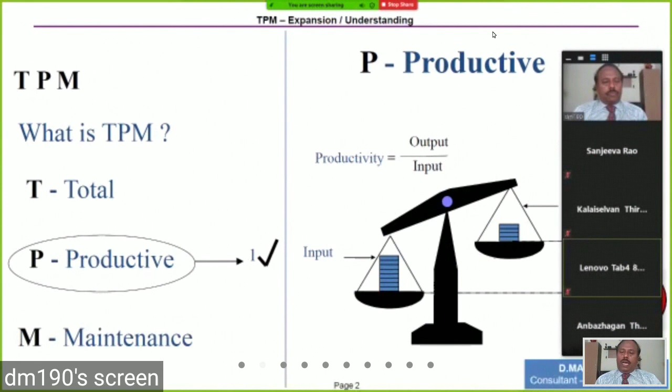So the P stands for productive, that is nothing but productivity, that is output by input. Then what does the total stand for? So what to do with the P? I want to increase the P. To increase the P, I want to know what are all the losses. So generally losses are categorized in two forms. One is time loss, another one is cost loss. Time loss is related to output. If the time loss is there, the output gets reduced.

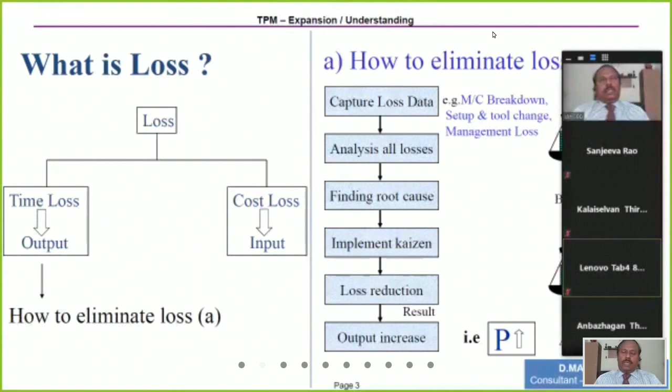What is the cost loss? So I have a lot of inputs, that is 4M, 5M: man, machine, material, method, money. If there is a loss, the input will get wasted, the money wasted. So loss is categorized as two losses, time loss and cost loss. Then what to do with the time loss? So you have to eliminate the time loss. So what you have to do?

So first you have to see what are all the time losses. How to eliminate the time loss? You have to see what are all the losses. Maybe machine breakdown stoppage is a loss. Then setup and tool change is a loss.

And one more big loss we saw in many companies, not only in engineering companies. Nowadays, I am not going to consultation only for engineering companies. I am going to pharma companies, textile companies, process companies, plastic companies, food and beverage companies. I am going to so many companies. In all of them, these losses are there.

And also a management loss. What is a management loss? Sir, I am waiting for some quality approval. I have given the samples, particularly in pharma companies. They will give the sample and it will go to the laboratory. The laboratory has to check and give the approval, then only he can start the next process. So you will be waiting hours together. And in assembly sections like BAPCO, they will all be waiting for washers. So these are all called management losses.

So you have to capture all these losses first, on a daily basis. Then you have to analyze the loss. Why this loss? It is waiting for QC, and it is taking more than the time. The standard time is only 5 minutes. Why is it taking 4 hours? So break down why it is taking so long. You have to take the phenomenon and analyze. That means first you have to identify the loss, then capture the loss, then analyze the loss.

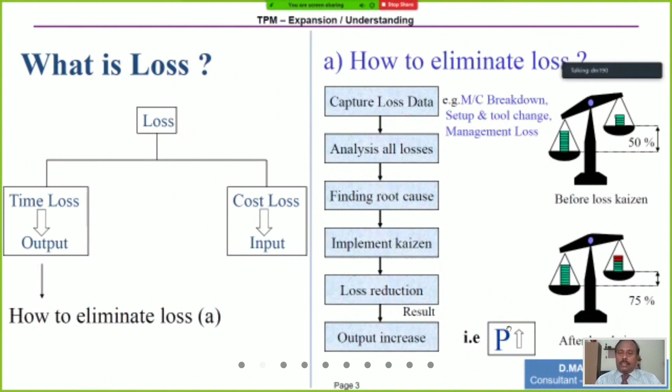This is what people call: my OEE has increased from the basic level of 50% to 75% by addressing these two losses. This is the understanding of P. Cost is reduced, that is, input is reduced. Production is increased, that is, output is increased. So by these two loss Kaizens, you can achieve your OEE.

So then who can do it? Is it a project approach? Is it individual people who have to do it, or can a team, a CFT, do it? No, it is T. T is total. All the employees of the operation team. That is what is written. All the employees have to do it.

Suppose the washer should come in time. Suppose the QC approval should come in time. Suppose a breakdown should be eliminated, it means all people are involved in this. All people, mainly in manufacturing, production, maintenance, engineering and quality. They have to work together in the first stage to improve this productivity. The previous two slides can be achieved only by this all-people involvement. That is called total.

So the importance of TPM, if I want to say what is TPM, my understanding in a simple word: increase production, reduce cost. This is what he has told. Yamaguchi is our guru in TPM. Not only in our company, he spread TPM across India. Increase production, reduce cost is the phrase he will always say. That is the TPM understanding. That is what I explained to you in these two slides.

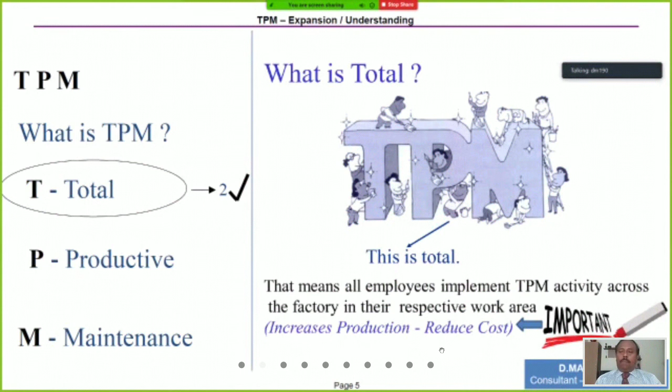Then what is the M meaning? People always think maintenance means the works engineering department, the maintenance department who is repairing the machine, who is doing the preventive maintenance. It is not so. Maintenance means you have to sustain the achieved results. For example, generally, today you have to do 2 crores production. Come what may, 2 crores should be our dispatch.

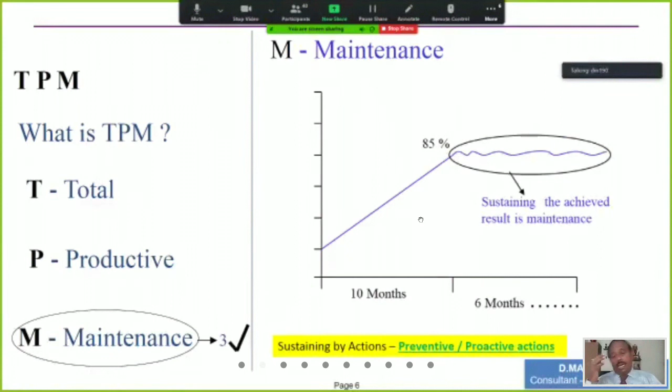Okay. Sustaining will not come by itself. Sustaining comes with action. Sustainment will not come by a standard. So it is not by an SOP, a standard, a work instruction, but by executing the work instruction, the SOP, the standard, the preventive maintenance, and checking the Poka-yoke working condition on a daily or weekly basis. That is called maintenance. Achieved results need to be sustained. So that is the understanding of the expansion of TPM. Okay.

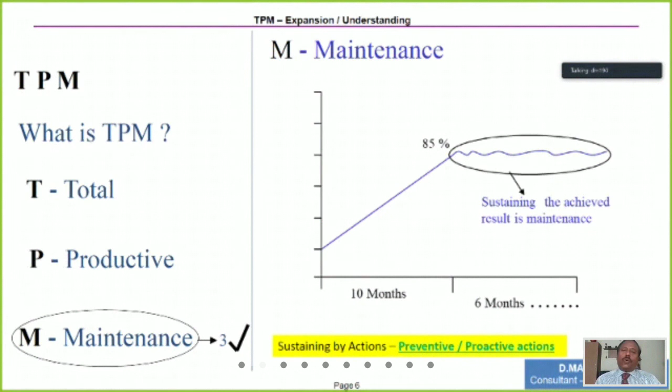Same way, you can think, Manivannan, what are these slides you are showing? It was all over by the 1990s. We heard of all these things in the 1990s. Okay. Now, in the present scenario, how to challenge with TPM is going to be my forthcoming slides. That's why finally they are now saying total productive maintenance and management. So management has to focus on these improvement activities. TPM is improving the health and strength of the entire company by way of TPM methodology.

One thing you have to understand, TPM has a very good write-up, for example, work standards. I have a manual called the 600 format manual. For everything, a reference is given there. You can just refer to it. But TPM is actually not in the book manual. It has to be implemented. Okay. Now we will go to the goal. What is the goal of TPM? The goal of TPM is the business environment. First, you have to challenge the cost.

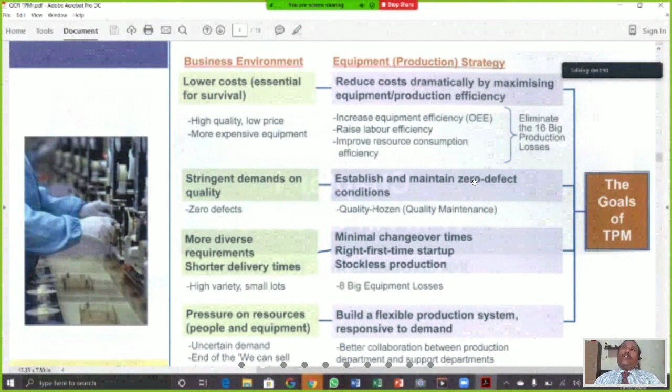Then a similar way is the quality. Again, the defect. You have to identify the defect and collect data. The management data is rejection, PPM. But the technical data is the product, the phenomena. You have to identify, then analyze, implement Kaizen, then you can achieve zero defect. After achieving zero defect, you have to do a lot of proactive actions, sustaining the zero defect with sustainment actions.

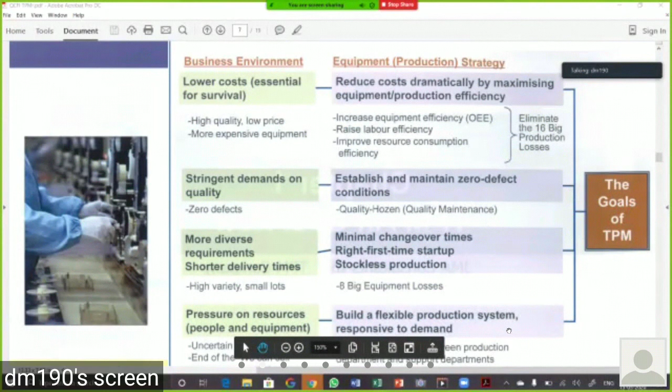Then minimum changeover time. This is one of the things: 8 big losses. Otherwise the equipment will not be available at that time. So you have to do this 8 big loss, equipment loss elimination. That is minimal changeover time. Then build a flexible production system, FMS. You may have heard of it. So these are all the important needs for the goal and the requirement. So I'm going to the next slide.

So this is a very, very important slide: what are the 16 losses? We have to understand what the 16 losses are. Let me give some time for the slide to come. The equipment is available for 8 hours if the shift is 8 hours. Now they are talking of 12-hour shifts. I don't know whether the labor department has approved it. In UP state, they're agreeing to a lot of amendments.

So for equipment effectiveness, the equipment is available for a given shift of 8 hours, and the labor is also available for 8 hours. But if the equipment has stopped, unless you do some correction, it will not run. That is called equipment related loss. But if the equipment is in good condition, the labor cannot perform because of waiting for instruction, waiting for material, waiting for approval, motion loss, waiting for logistics, pallets, cartons. This labor effectiveness will be affected.

Then another 3 big losses are cost losses: energy, material, and number of good products. A rejected product is a cost loss. There is energy loss, consumable loss, and yield loss. Yield loss is a big challenging item in many companies, whatever the company, even process, pharma, textile; everywhere we have a lot of yield issues. So in TPM, we call these the 16 losses. In general terms, we call this waste.

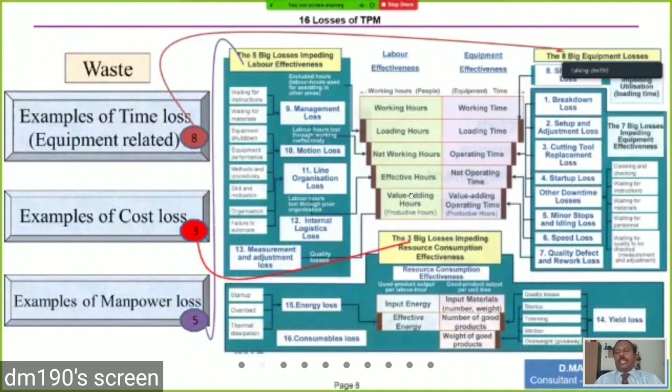So what is waste? Equipment related waste, 8 wastes are there. Breakdown, setup, tool change, startup, minor stops and idling, speed loss, quality defect, and other downtimes. This is 7 losses. And what is other downtime? The man is there, but he is not doing effective work. Why? Waiting for instruction, waiting for material, waiting for personnel, that is, no labor. So he should not start production without labor.

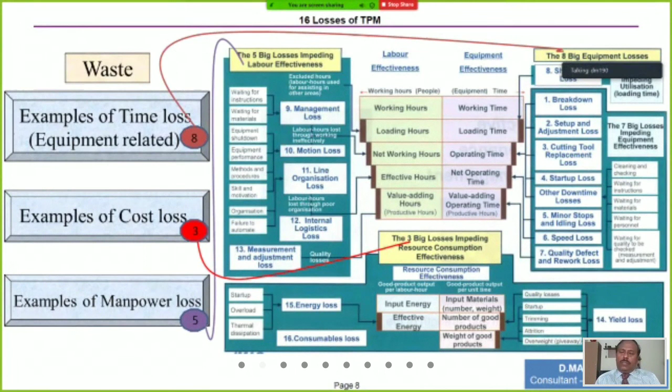So this is what we have as losses. So first we have to understand in manufacturing all these losses. So generally I am going for various type of industries now. No, I told already. All companies you can see similar losses. It can be material, it can be yield, it can be waiting time, it can be management loss, it can be breakdown loss, quality loss, all the losses. So this is a very, very important slide to understand the 16 losses. Okay, I understand it now.

So what is the TPM from production to company wide? So from production to company wide, you can see generally we first focus on the shop floor. Actually, we can see here, shop floor is consisting of one is production, another one is maintenance, another one is engineering, quality. So because I red marked it, actually the green should be like this.

So always the first stage of TPM is 4 pillar activity in full swing, and the other pillars support these 4 pillars in the first stage. Then the other pillars have their own work content. Okay, that will come in the second stage. So what we have to understand now is TPM has totally 3 parts. Part 1, 4 pillar activity supported by other functions. Part 2, you have to include sourcing and sourcing resource management. Then you have to include production control. Then you have to include development and design.

Then part 3, distribution and service, sales and research. So this is the production process. So we have 3 parts: part 1, part 2, part 3. The Japan Institute of Plant Maintenance, because first it will start with production alone, then it will be extended to the entire value stream. Why do we have to do production first, then the entire value stream? There is a logic here.

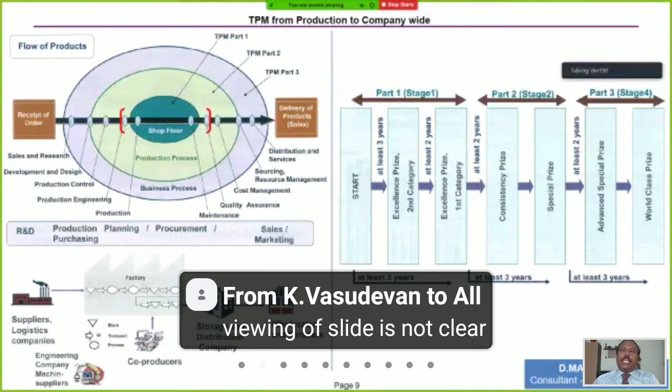Even in lean implementation, without doing TPM, if you start introducing lean, it will fail, because everything depends on the stability of the operation system. It has to be stable. When these 4 pillar activities are introduced, the operation system will be stable. After it is stable, you can proceed with extending the Kaizen activity or TPM activity across the value stream, including from supply to sales. That is why they call it 3 stages.

Stage 1 will take minimum 3 years. In many cases, we have seen it cross 4 years to achieve the target. They have 2 categories of award: excellence category 1 and excellence category 2. It depends on the volume of the business. That is stage 1. Then stage 2 is part 2. They call it the consistency prize: whether you are maintaining the achieved results consistently. For that, there is a consistency award.

Then a special prize for extending to these areas. If we extend to these areas and implement TPM there also, as guided by the book, then you can get the second stage award. It will again take minimum 3 years. Then the advanced special prize, then the world class prize. These are all the third stage. In this stage, you have to cover distribution and service, sales and research. Then you can go to the third stage. It will also take 3 years.

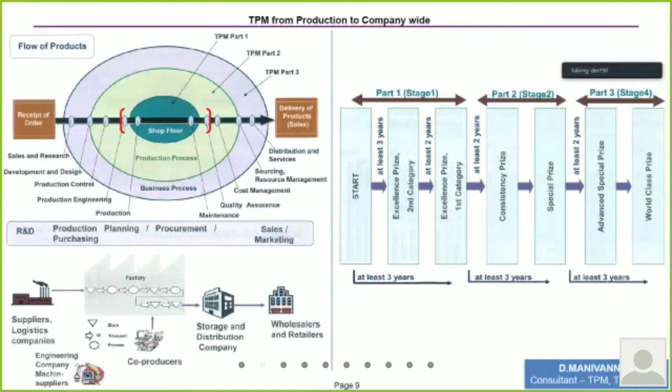So this is all about the TPM parts, TPM stages, the timeline, and the areas we need to focus on in each step, clearly mapped here. Again, it is a structured 12-step approach. All companies in India have strictly followed these 12 steps. What are the 12 steps? I put these steps one over the other in a slanting way, because without crossing the first step, you cannot go to the second step, and without crossing the second, you cannot go to the third. This is called the learning phase.

In the learning phase, you have to select a machine or a line. That is called the model machine or line concept. In that line or machine, all people have to work as a team to focus on these 4 pillar activities: Jishu Hozen autonomous maintenance, planned maintenance, quality maintenance, and Kobetsu Kaizen. That's what I listed here. For doing everything, education and training is very much required. In TPM books, you can see this clearly: preparation stage, kickoff stage, rollout stage.

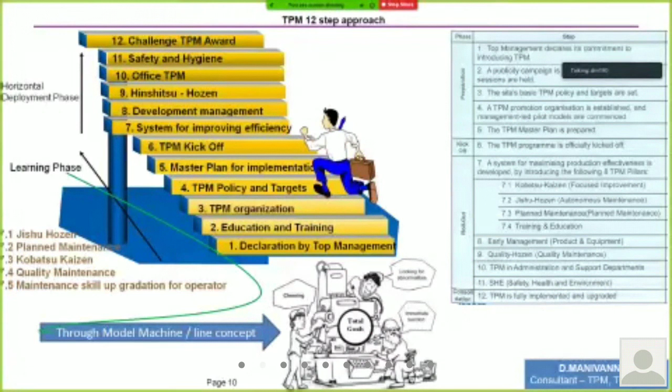Whatever TPM learnings we gain in the learning phase, you have to horizontally deploy in the other phases by selecting other groups of machines and lines. You cannot implement across the company at once. First, select one line. Then for horizontal deployment, you can select some 60% of the total capacity of the plant, then the next 10%, 20%, like that. For 60% horizontal deployment, it will take nearly 3 to 4 years to implement and achieve these targets.

So here you can see the first step is declaration by top management. I am not going to go into detail, because you all know this very well by now; TPM has been in India since 1998, and many companies are doing it. So first is declaration by top management, then training of all people to understand what TPM is. Then you have to establish an organization for TPM. Then you have to set policy and targets.

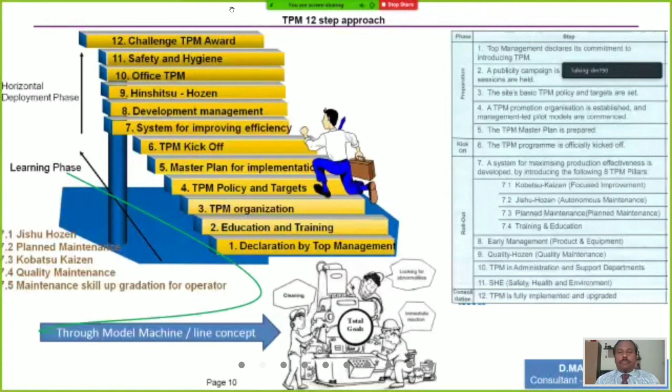Then you have to prepare a master plan. Then you have to do a TPM kickoff after achieving the model line results. After the kickoff, it is the horizontal deployment phase. This is what we generally call the 12-step approach. So now I am going to go into detail about the TPM pillars. First, if you implement TPM, you get an optimized human and machine system.

Human is also optimized, machine is also optimized. That means the machine is happy, the man is also happy. Both put together, I put the sketch. Machine is also happy, the man is also happy. That means if I am in step 1, it is not only the machine in step 1, the human is also in step 1. The machine has gone to step 2, then the man will also go to step 2. Machine has gone to step 3, man will also go to step 3.

That means first man has to go to step 1, he has to be trained and educated. Then he has to go to step 2, again trained and educated. Then he has to go to step 3. Then only the machine will improve from step 1, step 2, step 3 with the Kaizens. What is the man improvement? Man improvement is not his knowledge alone, his skill also needs to be implemented.

That's why in TPM training, we never give classroom training alone. We will give the shop floor training also, followed by classroom. I can give many number of why-why analysis classroom trainings, but it cannot be understood even to a level. I am an ME, production engineering person. Even I could not understand fully, even when our consultant came and taught us. Only when I went to the shop floor and did some practical why-why analysis, then the understanding was clear.

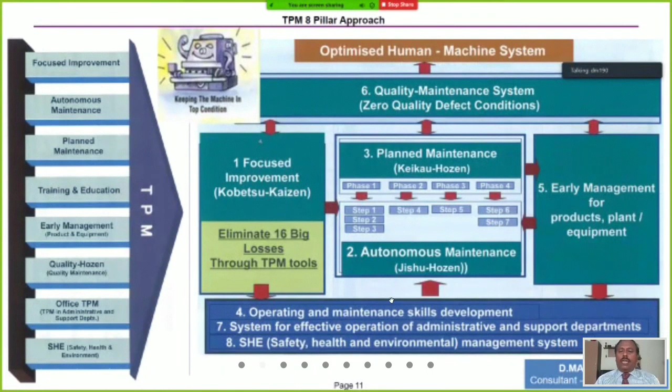First, we will go to autonomous maintenance. Autonomous maintenance is called JH, because it is a Japanese word. I always say for TPM, like our production technology professor, when he was taking class, he always said production technology is the backbone of mechanical engineering. Same way I will say Jishu Hozen is the backbone of TPM.

Jishu Hozen or autonomous maintenance is the backbone of TPM, because many companies, even today, have all the management data, 16 losses. So they know, sir, today I have to produce 100 numbers, I have produced only 50 numbers. 50 numbers is lost. That means 4 hours is lost. 4 hours, why? 1 hour breakdown, sir.

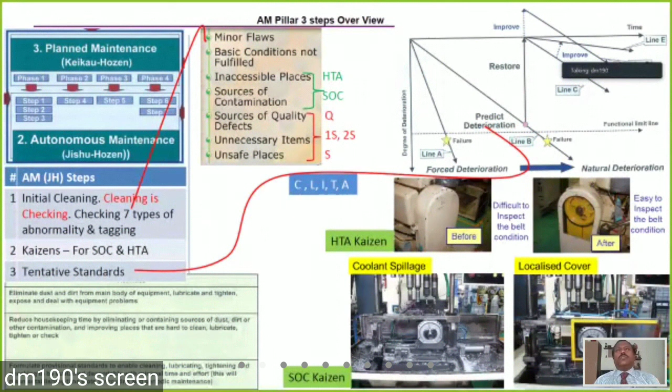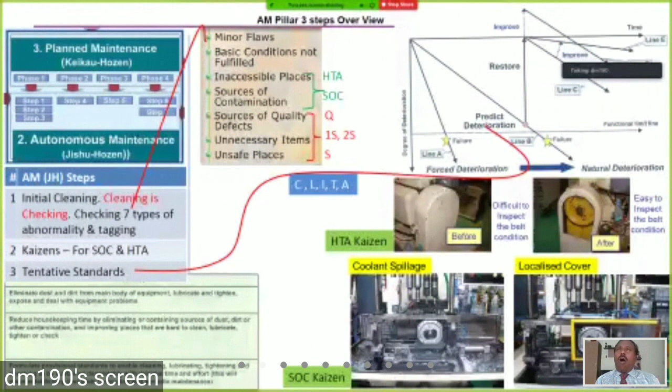So this type of data, that is why I told autonomous maintenance, the operator has to capture all data, both the management data and the technical data. Technical means not too deep technical. Exactly which sensor has malfunctioned, from which time it is malfunctioned. During that time, is there any some facts? Is there any power failure? Is there any product change? Is there a line change? Is there either we have stopped and it is soon after the tea time?

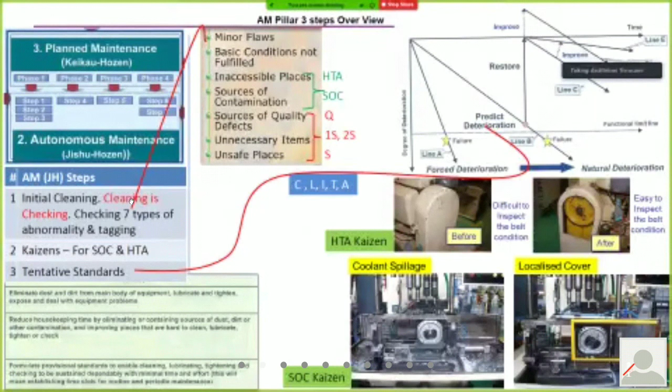Cleaning is checking. That is checking what? Checking the abnormality. What is the checking? What abnormality? There are 7 types of abnormality. What are all the 7 types of abnormality? Minor flaw, unfulfilled basic condition.

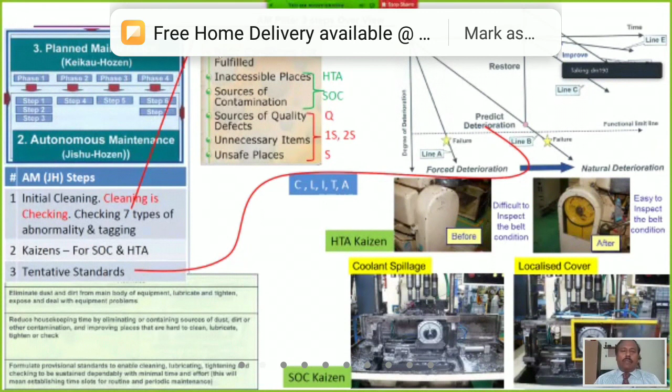But inaccessible place or source of contamination, it is something related to TPM. Why this is related to TPM I am telling. Hard to access means what? Hard to access is very simple. Now finally I told about this machine, how to sustain the achieved results by way of proactive actions. What are the proactive actions?

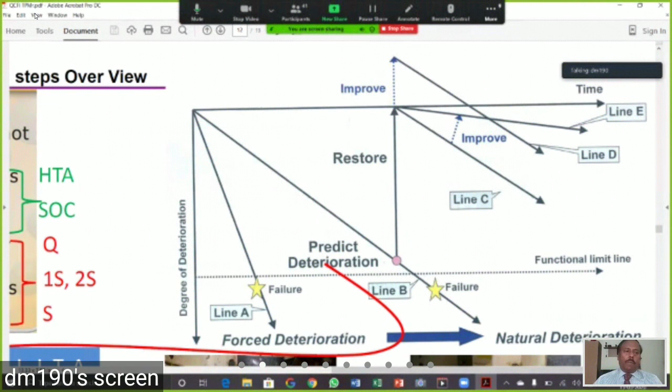But what is this improvement? I will tell this improvement when I am covering the PM pillar. Now you can understand what is the first step. First step is cleaning. Cleaning is checking the abnormality, then correcting the abnormality. What is the second step? In the first step, I have found out a lot of abnormalities related to SOC and HTA. You have to do Kaizens. What is the Kaizen example? I have given a Kaizen example here. Maybe it will take some time for you.

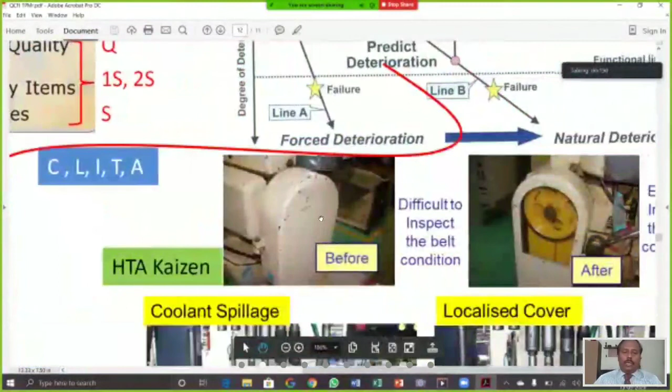Here, I cannot inspect the belt. I cannot inspect the belt means the belt failure will be known only after it has torn off or wound up. You have to make it easy to inspect. So you have to provide a window so that I can daily check the belt. If it is slightly wobbling, if it is misaligned, then the abnormality is noticed. That is called easy to inspect. Here it is difficult to inspect, here easy to inspect.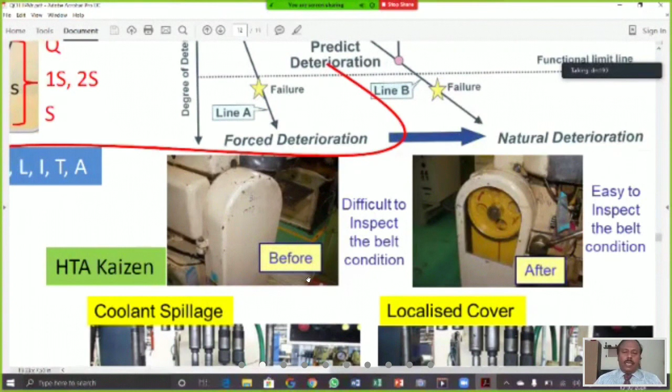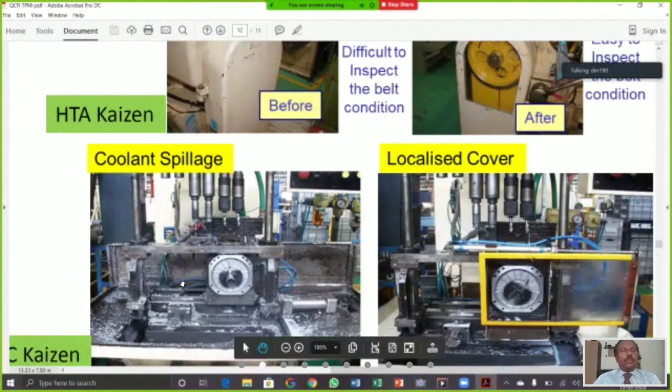Similar way, sir, this machine, all the coolant and burr, these are all coming out. So what is the source? Coolant or burr. So no coolant and no burr means no business at all. I cannot do business. My business environment will have coolant and burr. Then what to do? Then you have to contain the coolant and burr here itself, instead of it going out. Then you put a small cover here so that all this contamination will be contained in this area. It will not come out. So this is the example of Kaizen. Like this, you have to do hundreds of Kaizens in one line. That is called step 2.

Then step 3. Step 3 is tentative standard. After addressing it, you have to create a standard, that is called cleaning standard, lubrication standard, inspection standard, tightening standard, adjustment standard. That is predicting deterioration. I will predict it and it should be restored. Who will restore? Sometimes some percentage, 10%, will be restored by the operator itself, then 90% by maintenance people.

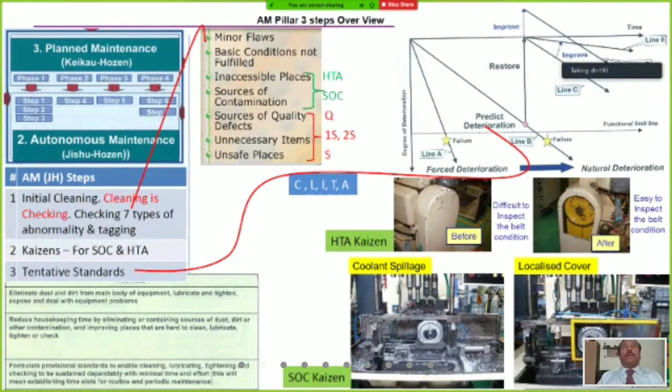That is what I am telling you. If I do this CLITA, you can predict deterioration and restore it. And step 2, that means in a simple way. First, step 0. Step 0 is training everybody. Training, giving not only theory knowledge, but skill knowledge also. Knowledge and skill training, both classroom and shop training. So step 1, very simple. Cleaning is checking the abnormality.

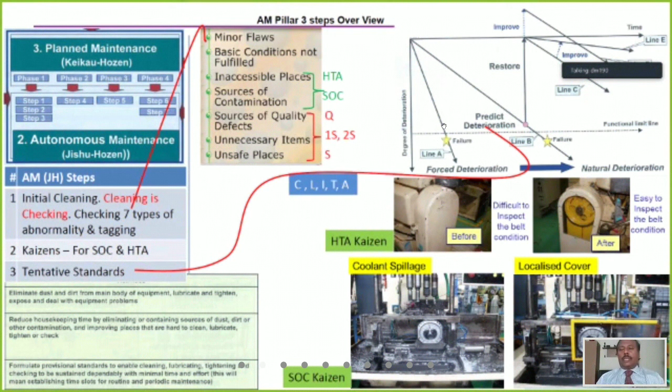Step 2, Kaizen implementation related to HTA and SOC. Step 3, creating tentative standards, training the operator to execute it, then he will execute so that predicted deterioration. It is nothing but I am predicting the deterioration after shifting this line to this area. I am predicting the deterioration. That is what autonomous maintenance step 1 and 2 and 3.

Then we will go to planned maintenance. Planned maintenance, again, there is step 1, 2, and 3. Very simple. What is step 1? Support autonomous maintenance. What support activities?

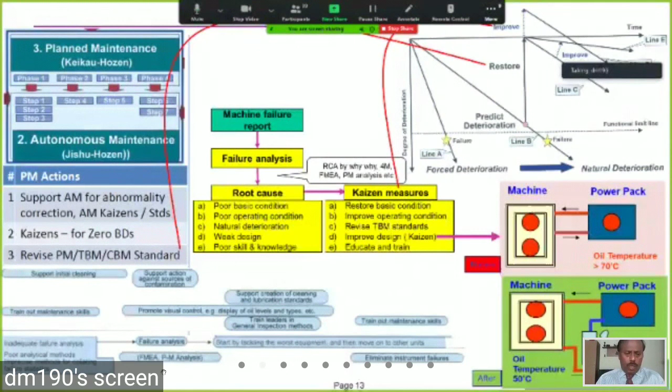You have to do hundreds of revisions to your standards, existing standards. Go on, revise it as per your root cause analysis. And you can see here. Okay, I will go to that. So in the books, each and everything is very, very important. They have given lot of things here. You can see lot of things is here.

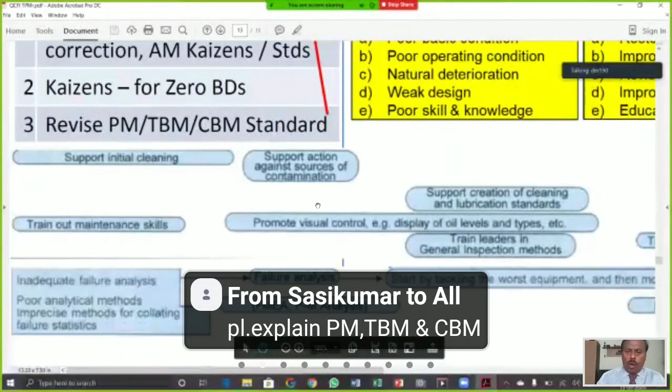You can see failure analysis, fault tree analysis, PM analysis, 4M analysis, FMEA, even failure mode effect analysis of equipment will give lot of proactive action list. That is, you have to decide lot of detection system. After deciding detection system, if you do the FMEA, if the root cause is forced deterioration, you have to find out the prevention system. After the prevention system, you have to go for a detection system to sustain the prevention system. So such a lot of things are there in FMEA.

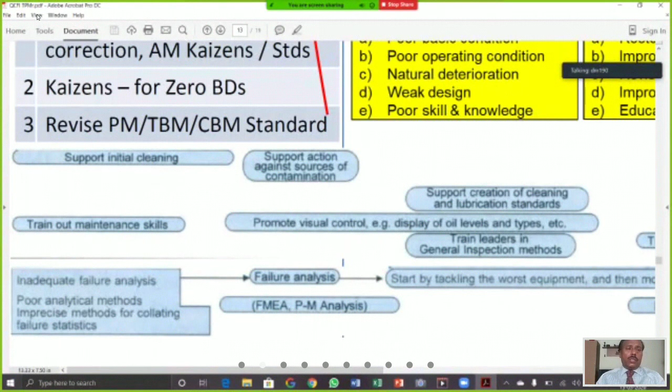So that means in the step 2, you have to do lot of analysis, lot of Kaizens. Then in step 3, you have to do your standards revisions, so that finally you will have this curve achieved. You can go on that. So one simple Kaizen here you can see, one machine will always give quality issues because the machine oil temperature is greater than 70 degrees before Kaizen. Why? Because heat environment.

Suppose in Chennai, Delhi and all, during summer, the temperature will be very high. The oil temperature goes to more than 70 degrees. He has given a Kaizen. In this return line, he provided just a simple radiator cooler so that the oil temperature is maintained below 50 degrees centigrade. Like that, you have to do hundreds of Kaizen, by way of getting all the technical data, then analyzing it. That is very, very important.

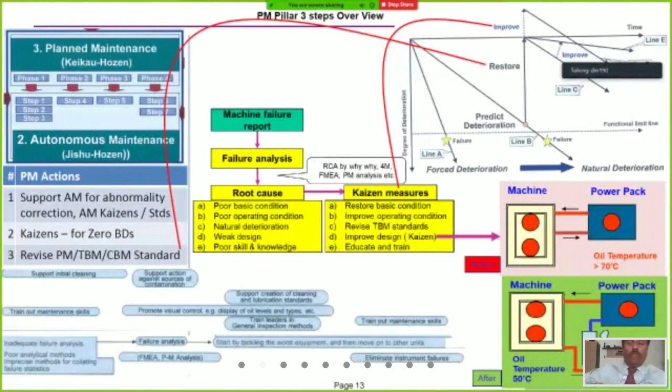Then quickly, 12:50. So now again, I will go to KK. KK is focused improvement, that is Kobetsu Kaizen. Again, 3 steps, but there are 7 steps. I am covering in this lecture only 3 steps. First, we have to understand this KK. You can see this graph.

First, the KK team will identify a lot of projects. By doing the projects, the performance will improve. Then it will slightly fluctuate. At that time, Jishu Hozen and planned maintenance have to sustain the activity by way of actions, then improve, then sustain. Sustain means all these projects are converted into work instructions, SOPs, preventive maintenance checklists or CLIT checklists. Like that, a lot of checklist revision will happen. In this revision, you have to sustain. Then improve, sustain. That means all the team is going to be involved in this KK.

KK is nothing but Kobetsu Kaizen. Set theme and target, draw a plan is step 1. Step 2, analyze all the 16 losses. Step 3, implement Kaizen by way of analysis. Telling is easy, but here I will tell the backbone of TPM is autonomous maintenance. They have to precisely collect the loss data on a daily basis, shift-wise, in fact hourly. Not only production data, hourly stoppage data must be collected, and you have to understand where I am among the 16 losses.

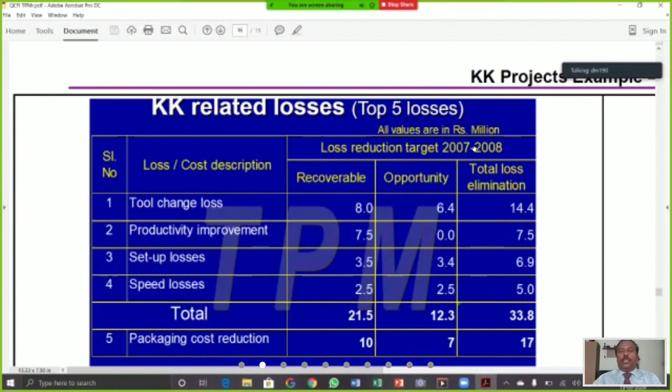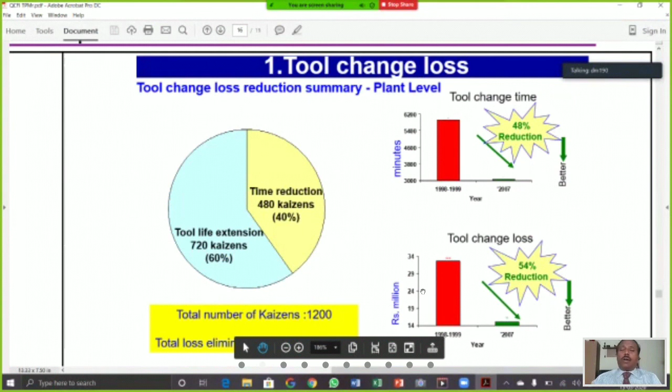1200 Kaizens. In identified machines, 1200 Kaizens they have done, so that they have reduced the tool change time 48%. They have reduced the tool change loss, because we call everything a loss. Cost reduction means cost. The tool change loss in million rupees, that is 54% cost has been reduced. So similarly, that one is an example.

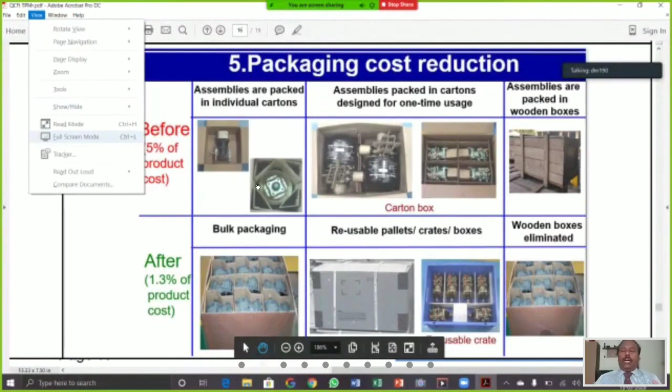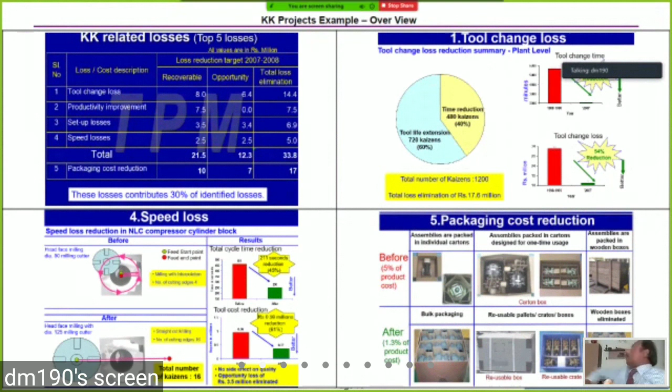So by this we are able to, these are all the examples of KK. So now we covered PM, AM, KK, step 1, step 2, step 3, methodology, training, everything has been addressed. So again I will tell you the OEE calculation. Again you all know OEE calculation.

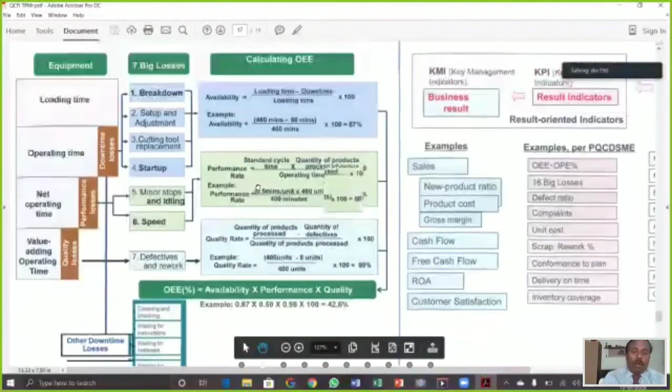After eliminating, you have to do this KPI, KMI. That is very very important in TPM. KMI is management indicators. What are the management indicators? Sales, cash flow, free cash flow, ROA, then customer satisfaction. These are all KMI.

So if I track this KMI, I will know all these KPIs. Which KPI? OEE, big losses, defect ratio, complaint, unit cost, scrap, rework, then conformance to plan, then delivery on time, inventory. These are some examples I am giving. So to improve these KPIs, I have to do these actions.

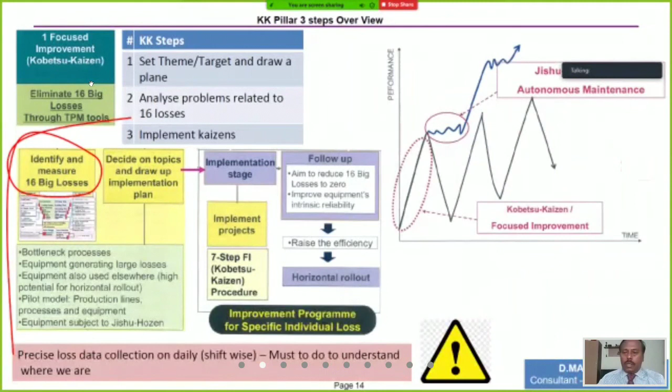What is the action? Very simple. Kaizen, sustain by proactive actions. Do Kaizen, sustain, do proactive action, standardize. So you have to do proactive actions. This graph should be there. You have to understand, the graph shown in KK. So you have to improve, then sustain, improve, sustain. Like that you have to go on. That is what I am talking about.

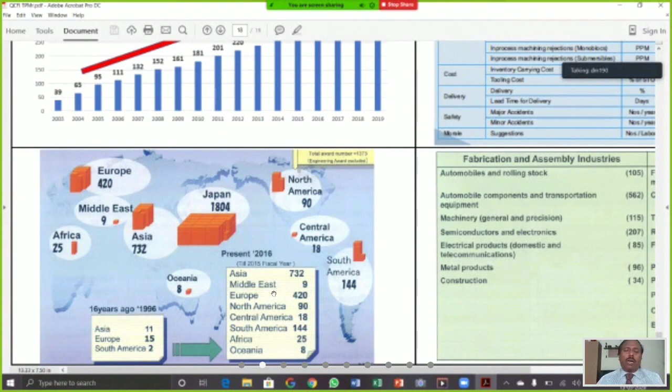No, it's also automobile components, machinery, semiconductors, electrical products, metal products, construction, textile, ferrous and non-ferrous, food and beverage.

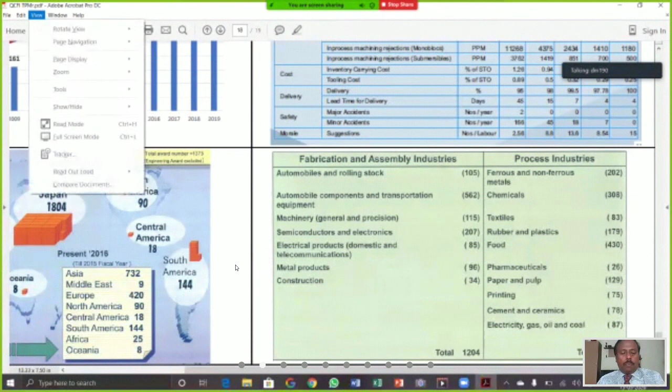Now this is an example. You can see here how many companies. For example, in textile 83 companies do it, in chemical 308 companies, in ferrous and non-ferrous metal 202 companies, in pharmaceutical 26 companies are doing TPM.

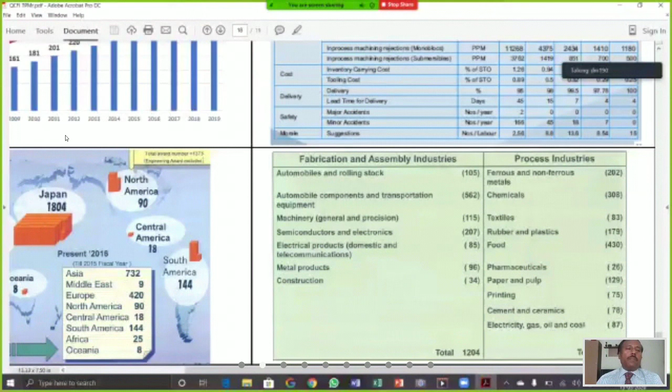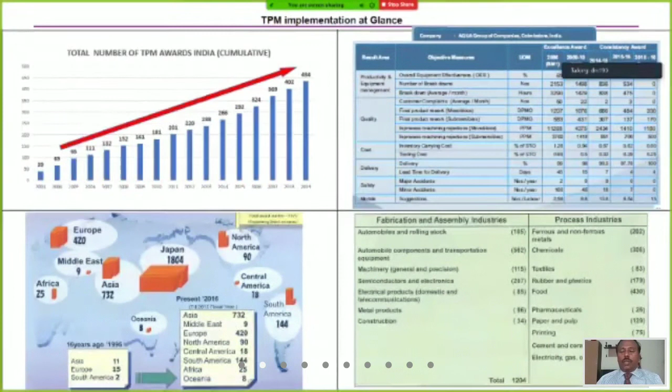What I am going to tell you is just a TPM implementation at a glance. I am giving a picture overview. These are all the TPM companies, what they are doing and enjoying the benefit. So by this, I am ending the session, so that even though the slides are not clear, I might have given some inputs, that is advanced inputs.

In the 80s and 90s they told what TPM is, but I am telling. For all the pillars like this, 7 steps are there in detail. What to do is there, but we have to convert it into action. So this is about the TPM basics overview. Over to Narasimhan, please.

So now over to Mr. Narasimhan for consultation. Yeah, it's a very good presentation, Manivannan. In fact, on behalf of all the participants, I thank you. Beautiful, total productive maintenance, total productive management also.